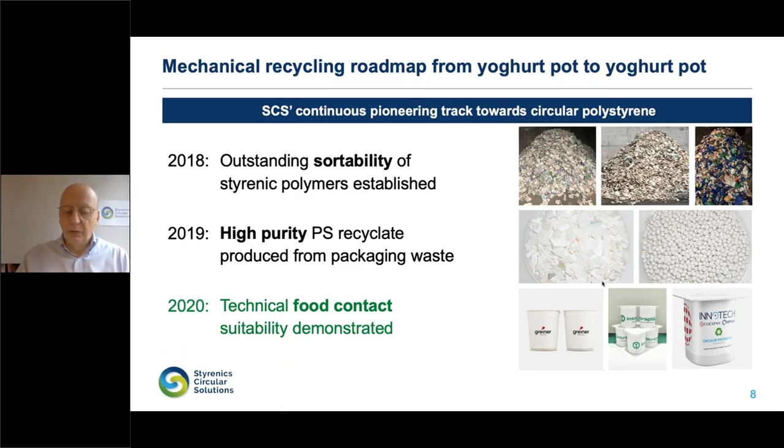Last year, we could announce the production of high purity mechanical recyclate, and also there that was a surprise. And this year we continue the pioneering track to, let's say, what is the highest possible, and that is technical food contact suitability. So this is indeed great.

And as a matter of fact, if you look at polystyrene packaging, the most striking thing is that it is overwhelmingly food contact. You can see, of course, different forms. Sometimes it's rigid, sometimes it is foamed. But what we have found is that all these types can be perfectly sorted from each other. And so that was done in detailed sorting tests with our SCS member Tomra.

And we can distinguish the GPPS from the EPS from XPS. HIPS can even be distinguished by a percentage of rubber. It is really amazing. We didn't expect that ourselves. So that is an excellent basis for the production of recyclate with very precise properties.

Now, we expressed the ambition to close the loop from yogurt pot to yogurt pot. And if you want to develop a good feedstock for dairy, it's obvious that we want to focus on white HIPS, right? Not because the colored HIPS cannot be recycled. On the contrary, PS has excellent outlets for colored recyclate. But for returning to dairy, what you really want is white HIPS.

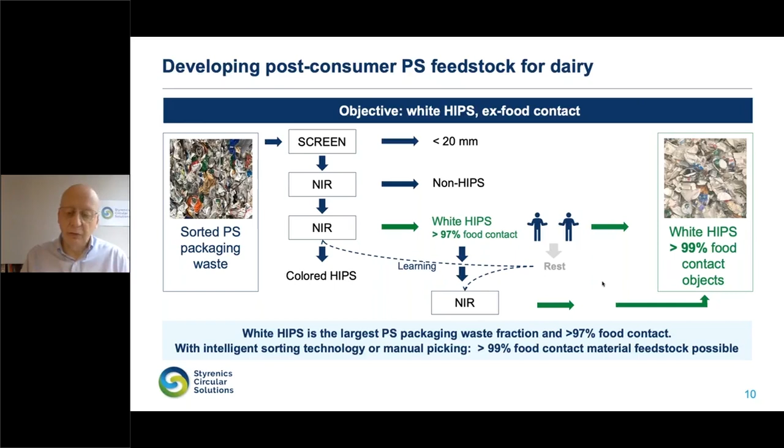Then our recycling process, actually, was completely inspired by the mechanical recycling process that was developed for PET. But we improved it because, let's say, the contamination and the typical design features of yogurt pots are different. And so the result is a very powerful process that is really optimized to the typical yogurt pot design and the residue. And it removes basically all aluminum, paper, foils, organics, and even printing inks.

So in developing that process, we also learned how to control the washing process, because it's a tricky part. And basically what we do is you take the freshly washed recyclate and you wash it again in more severe conditions, and then you analyze the water quality. And there can be a big difference between existing recycling processes and washing processes, actually.

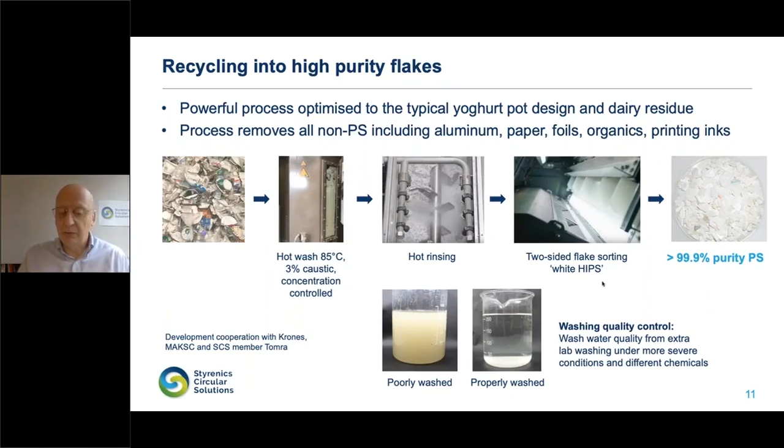And here, this is the last missing mile, actually: super cleaning and challenge testing. And here again, we were helped a lot by the outstanding quality of PS. It has low diffusion characteristics similar to PET, actually. That makes it very suitable to achieving food contact status, because it doesn't behave like a sponge.

The surface, the matrix of the polymer, is really closed, and it doesn't absorb a lot of contaminants. And for the things that might be in the polymer, this property prevents them from migrating out of the polymer into the food. So this is a key characteristic for suitability for food contact.

Then we had to apply challenge testing technology for deep cleaning in order to correspond to the very high EFSA requirements. And for that, we are very proud today to announce that last month we achieved a success with the Gneuss technology. And actually, the Gneuss technology is already a mature industrial PS reference. It is already used in Japan since 10 years, where 70% of all Japanese PS trays are recycled in this technology, and it happens under an FDA approval.

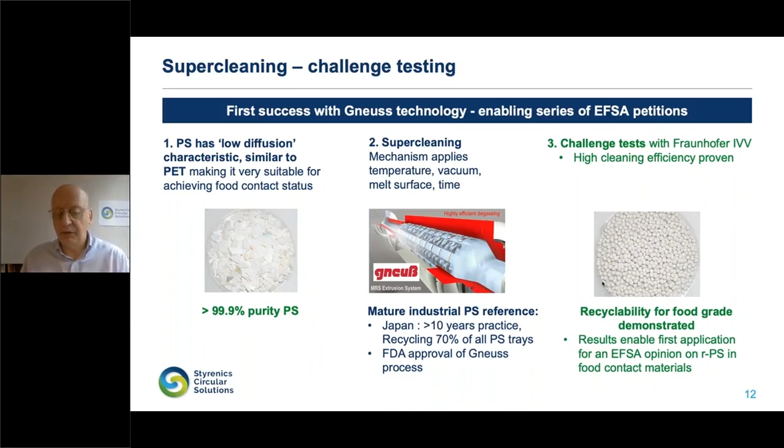So what we will do now is, based on our test results, use this for a first petition of EFSA in order to obtain authorization for food contact in the EU. And one very good news that I can already announce, and that's a prime announcement actually, there are very promising results with a second technology, of which you will hear in the next period. This is definitely in our pipeline, and so it means that we are working on widening the range of technologies for future investors.

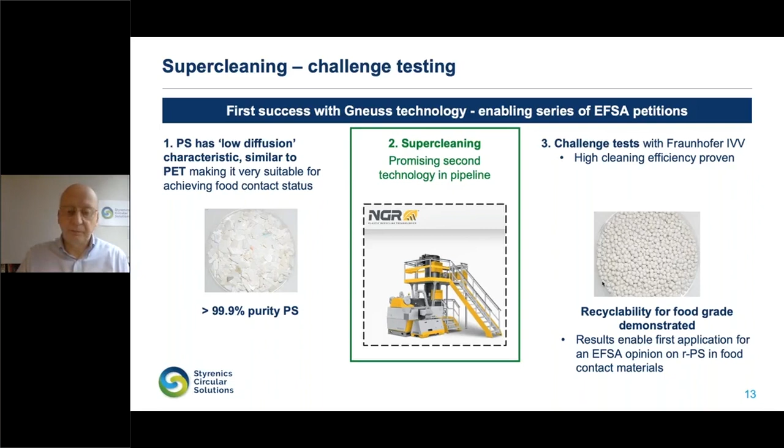Now, the recyclate produced this way was on top used to make real filled yogurt pots by the 3 converters that are members of SCS, COEXPAN, Intraplas, and Greiner Packaging. You will hear it from them in a few minutes, but the results were great. There was no observed degradation of the polymer. The purity was very good. No remarks on the smell or taste of the yogurt. And also in the processing, our PS behaves like virgin PS. So that's the best that we could expect.

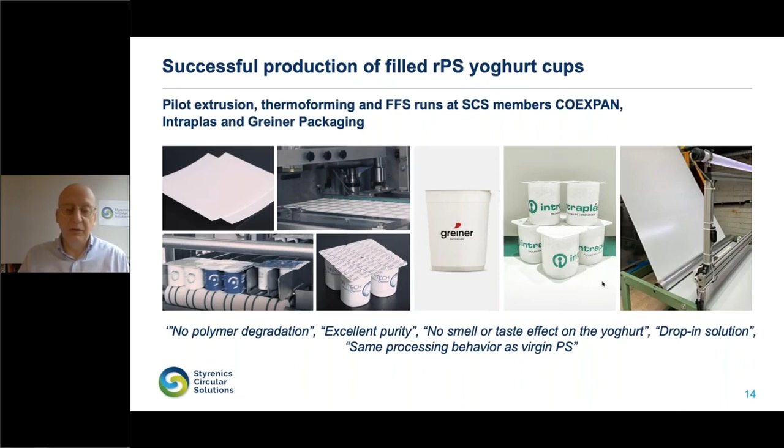And last but not least, we have prepared an industrial blueprint for interested investors. Many parties have been watching what we are doing, and many parties have been waiting for the demonstration of technical food contact suitability. So what I expect is an acceleration of industrial initiatives, and what we offer to these interested parties is a blueprint with flexible plans so that they can adapt the percentage of PS to the availability of feedstock and to the demand. It can be used for PS but also for foamed PS.

Typically, in order to be competitive, what we propose is something like 50,000 ton per year sorted feedstock input, and that will produce 33,000 ton per year recyclate production. The capex is like 40 million. You see the typical layout, but in this way it is really cost competitive versus virgin PS. So from all aspects it's an interesting investment. And in order to support this kind of investment, we are also ready with the members of SCS to support testing of process with a semi-industrial line that is now starting up. So I would say we are really ready for the next steps.